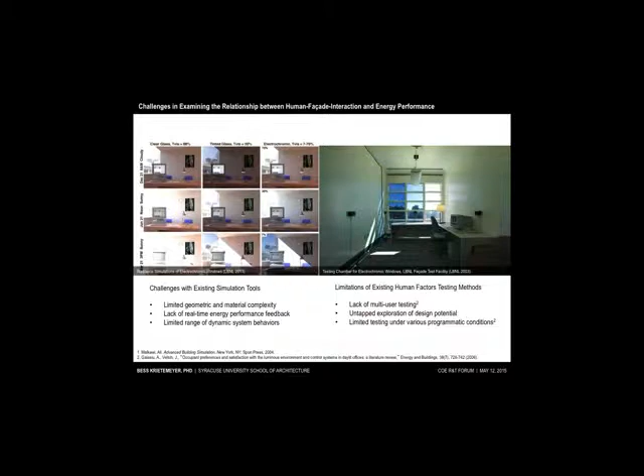And the research we have out there shows enormous potential for these dynamic facade systems, things like electrochromic windows, which we have right down the hall on the 3rd floor. But a lot of this research tends to focus on energy efficiency while postponing human factors issues. So there's often a separation between the analysis of energy performance testing from the human factors testing when we're evaluating a new facade system's responsive behavior.

We also have incredible facilities like LBNL's FLEXLAB, which is a great resource for testing advanced building systems. You can get measurable feedback on the energy impacts and environmental comfort, and it starts to incorporate users in a really important way. One of the biggest challenges with these facilities is that it does require us to build full-scale physical prototypes of these systems, and usually multiple prototypes if you want to test multiple iterations of them. That can be pretty costly to build.

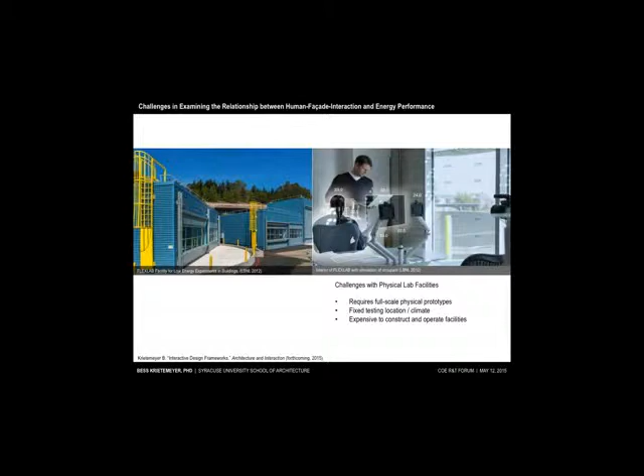So in addressing some of these technical and social challenges, our research focuses on developing a computational framework for examining the relationship between human interaction with these new facade systems and really trying to understand the impacts on the energy performance of the building and also on architectural design.

So in doing so, we're constructing these augmented reality simulations that are based on real physical material experiments that are in the early phases of prototyping. The idea is that by testing these new material systems in the early prototyping phase, for both energy performance and for user control, the goal is to avoid reinscribing this divide that currently exists between these two kinds of quantitative and qualitative criteria.

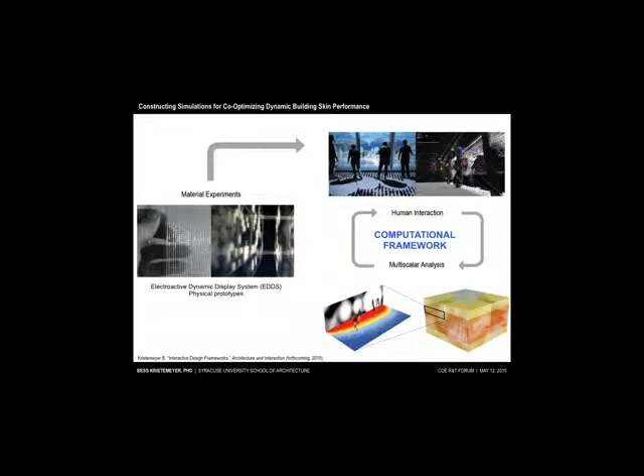So one of the systems that I spent many years working on, you'll hear more about it from Brandon Andow, we're using as a primary test bed for a lot of the simulation work. This system is called the Electroactive Dynamic Display System, or EDDS. It's a dynamic facade technology that's been developed at RPI's CASE. It embeds electropolymeric materials within the interior surfaces of an insulated glazing unit for a very highly responsive condition across the building facade.

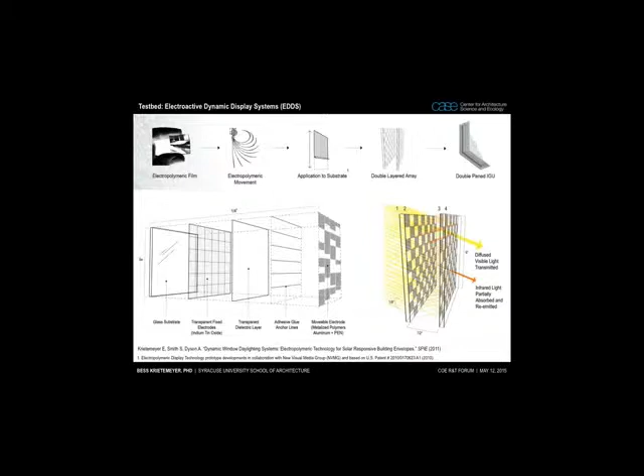So each polymeric micromuscle acts like a little pixel in a display screen. So we have a lot of opportunities for user control over both the environmental effects and the visual patterning effects. This particular assembly relies on an electric current to alter the mechanical behaviors of individual metallized polymers within an ITO matrix.

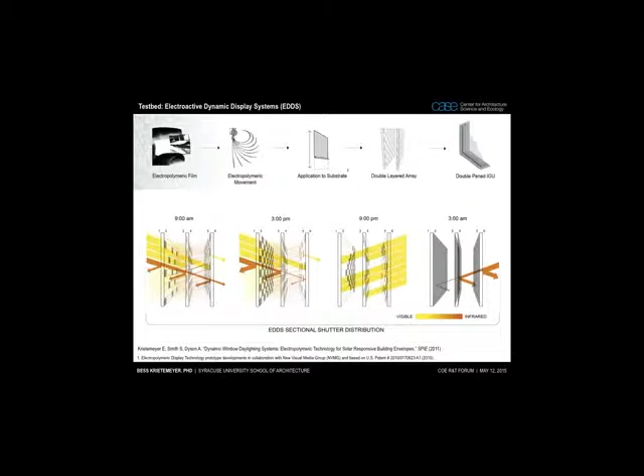And when combined into multiple layers for a double or triple pane glazing system, the whole system can be programmed to geometrically track the incoming solar radiation to block, absorb, or diffuse light in the visible or the infrared spectrum, while still maintaining views past the open pixels. At the same time, the EDDS could be programmed for interior applications or customized for individual preferences along the facade for things like privacy or other kinds of media or information display.

It can also track multiple users within a space, while still adjusting to the changing exterior environmental conditions. So one of our big questions was, if we have so much control over what the facade looks like from a user perspective, what are the effects of this on the overall energy performance of the facade and of the building? And how do we design these adaptive materials to negotiate between the environmental and the occupant demands at the same time? So how can a simulation tool better integrate these criteria?

So we started developing a simulation tool. These are some images from an earlier iteration of this simulated environment for programming the EDDS, and this was installed at Rensselaer. In this setup, we have a semi-immersive projection environment that's simulating the dynamic patterning of the EDDS, and it's visualizing the daylighting effects in real time.

So the idea of a semi-projected, large-scale visualization environment was really crucial to the research because it allowed us to test the environmental effects of a new material system that wasn't physically scalable at this point in time. There are, of course, limitations to the use of projection, along with the need to incorporate multiple users within the simulated environment. So we want to be able to tie in multi-user control to algorithms that help us understand the whole building energy impacts.

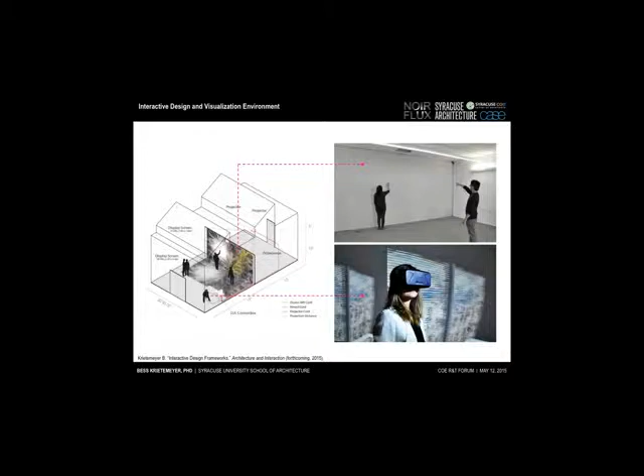So the next generation of this simulated environment is being developed through the Interactive Design and Visualization Lab, which is located right up on the 5th floor here at the COE.

So here the interactive simulations are being improved for their speed and their accuracy relative to the environmental and human response. We're starting to incorporate gestural interactions and other kinds of applications for remote control. So in the simulated environment, you can use multiple sensors to actually indicate where people are, not just relative to their proximity to the facade.

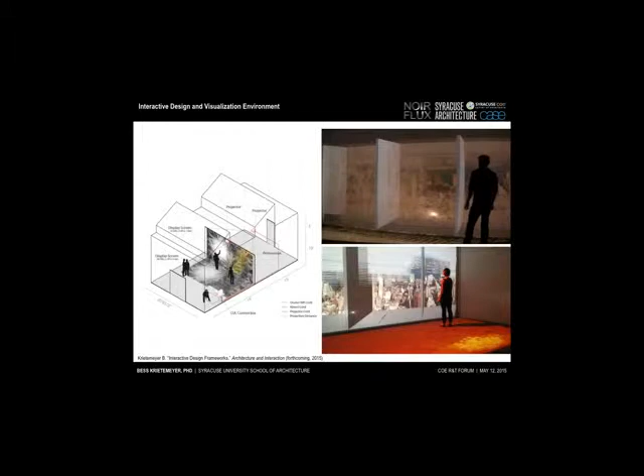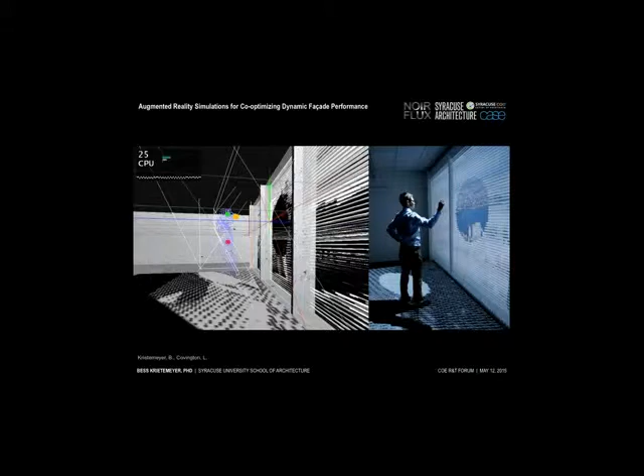So the idea is we can test multiple material prototypes. We can test a range of complex geometries and different patterns, and then link this simulation with commercially available energy analysis software, where we can start to test new methods for human interaction. We can design these new methods, record them, and analyze them based on a range of user inputs.

And we can experience not only the interior conditions of the room, but also the exterior conditions as well. And basically plug in any 3D model, any geometry, or any kind of facade system that you might want to simulate. So again, it's a framework. We're using the EDDS as an initial test bed, but the idea is we can swap out different types of systems, whether it's electrochromic windows or maybe systems that are being developed in other areas in campus that, again, haven't been able to scale up physically just yet.

So these are just a couple of views of the simulation, a couple of exterior views, where you can see the simulation is tracking one person's perspective on the left, and on the right would be our own perspective as we're kind of moving back and forth along the screen. So we're looking at basically a big 2D simulated screen, which we can see upstairs.

We're developing techniques for data collection, where we can document and record gestural interactions so we can start to analyze the tendencies to which people might modify or adapt their own response based on the way that the facade is responding. So there might be a kind of learned behavior between the user and the facade.

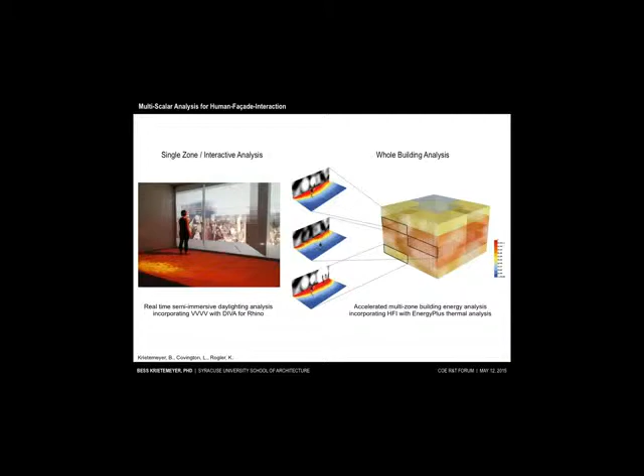And how can we design the algorithms, the control algorithms for these material systems to reduce the building's energy loads and also accommodate the multiple occupant desires for controlling views, privacy, comfort, patterning? So we're now linking the interactive simulations to whole building energy analysis tools like EnergyPlus, so we can understand the environmental and the visual impacts simultaneously of this kind of live interaction at a larger building scale.

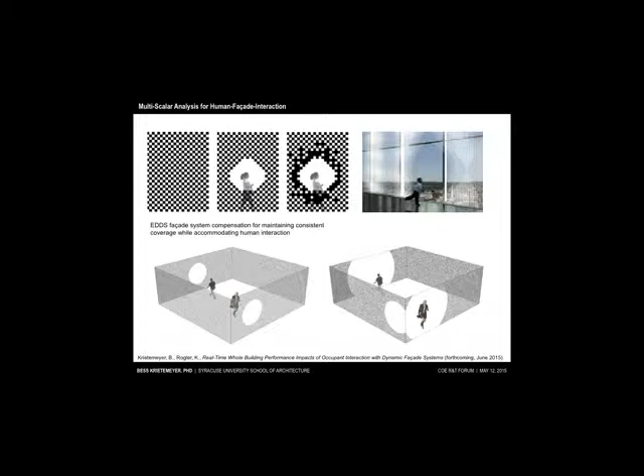And we're starting to examine ways where the system might have to compensate in order to maintain a desired solar control or a specific daylight level in the interior, where it might have to adjust its pattern densities depending on how a person might kind of interrupt its default solar tracking state. And then integrating this information again into the EnergyPlus whole building energy modeler.

And there are still a lot of assumptions within this workflow, such as how we might translate a complex material geometry to a value that EnergyPlus can actually understand, along with the need to calibrate more precise material properties of the physical prototypes to these digital simulations.

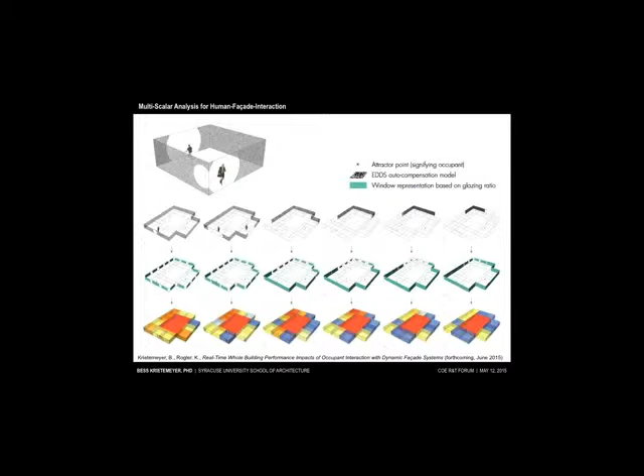But the framework is in place for this whole building analysis to consider live human interaction as valuable input in the design and development process, where we can understand both the environmental and the architectural implications of interaction at multiple scales. And it's really important in this case that we're able to expose these methods to a wider audience and in different settings to get a range of user input. And again, develop these simulations in parallel with the physical prototypes.

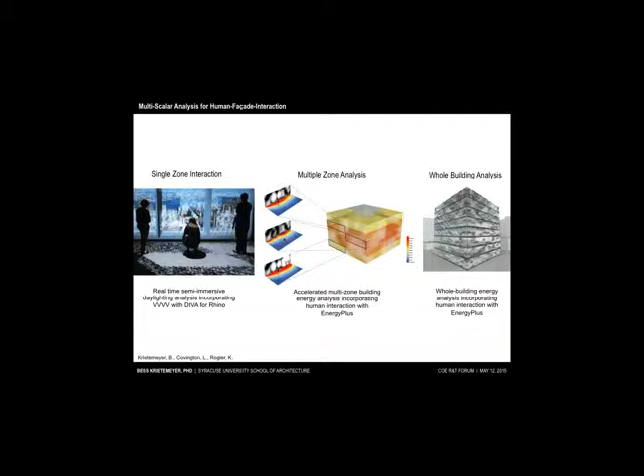And there are a lot of challenges we're still working through in terms of the kind of mobility of the simulations or the need to support multi-user tracking. And we're working on these through the research that's incorporating virtual reality tools like the Oculus Rift head-mounted display. So with tools like the Rift, we can simultaneously design and interact with a dynamic facade in virtual space.

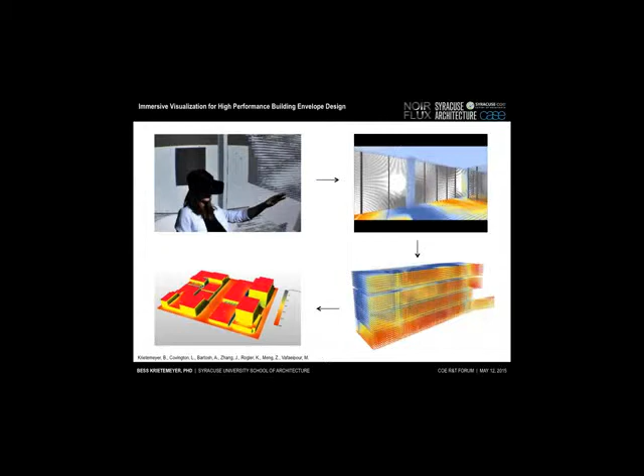We've kind of moved from augmented reality to immersive reality, and still have the ability to modify its behaviors in real time, and still have the ability to understand the energy implications in real time. So we're pushing these boundaries to the whole building and even the urban scales, where we can visualize both dynamic systems in action, but also visualize the kind of ambient energy flows that are happening at these multiple scales. And we'll hear a little bit more about that from Amber's presentation in terms of these other multi-scalar virtual reality applications.

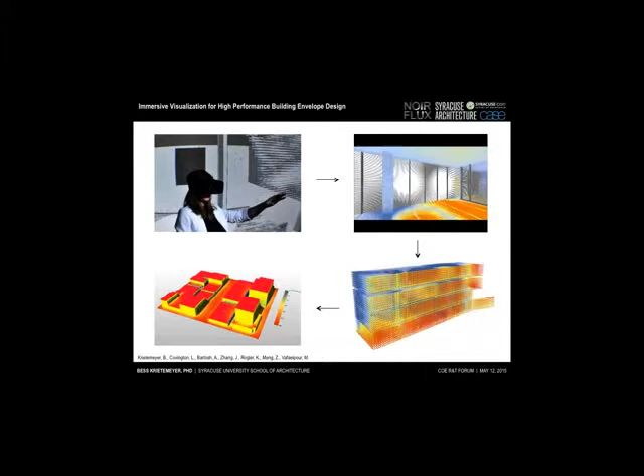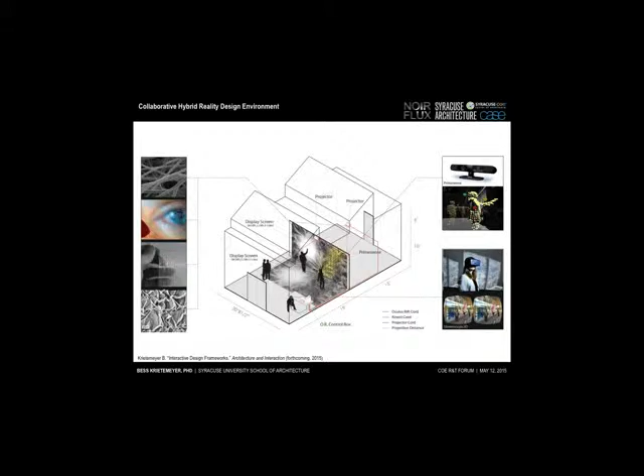So this combination of the hybrid reality simulations offers a lot of exciting opportunities for the testing process, but also the architectural design process, where people could actually collaborate remotely on the same interactive virtual model, which starts to provide a common visual language where we can receive real-time energy feedback on design decisions. So this starts to enable an interdisciplinary dialogue between the lab-scale materials research and these interactive spaces that can visualize and test their scalability within a range of environments and applications.

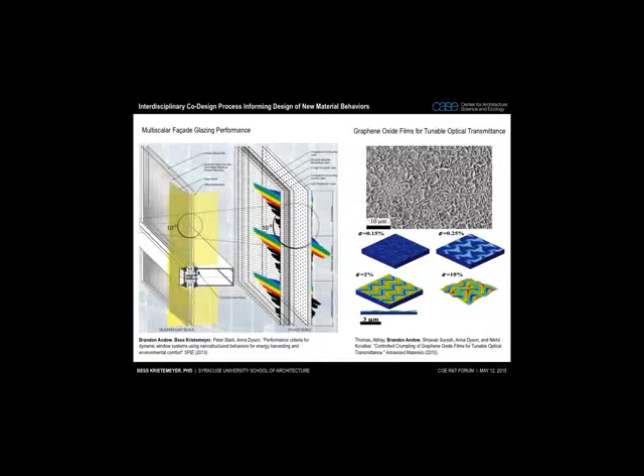So one example of this is, as a result of the simulation work with the EDS, a broader set of architectural criteria for both environmental and user-driven performance is pushing for greater adaptability of these materials at not just the micro, but now the nano scale. We'll hear more about that from Brandon's presentation, but again, there's a stronger emphasis now on criteria for user control, what the architectural implications are in terms of aesthetics and appearance. So all of these things start to become important parts of these design feedback loops.

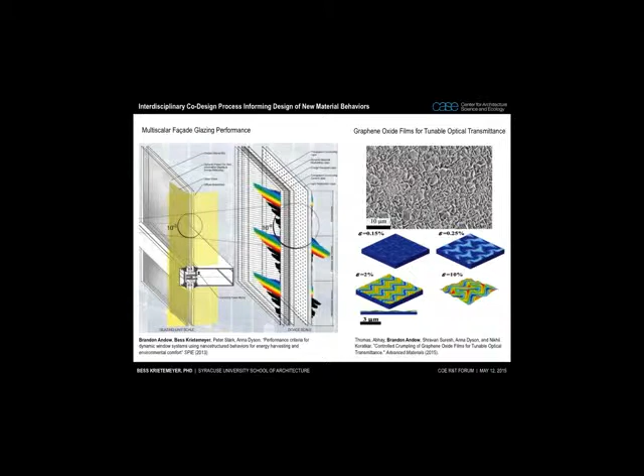So our goal is to continue developing these simulations along the multi-scalar physical prototypes for new advanced building materials and systems. And the idea, again, is by simulating the behavior of intelligent materials at larger, full scales for human factors testing, the feedback that we get from this computational framework can actually start to inform the engineering and the material prototyping of these systems in their early development phase.

Thank you. Bringing up Brandon's presentation. Yeah, that looks good.

I'll introduce Brandon Andow. Brandon is a Ph.D. candidate at RPI's Center for Architecture Science and Ecology, CASE. He is researching multifunctional dynamic glazing materials and solar responsive facade systems. The aim there is improving energy efficiency in buildings while also improving indoor environmental quality. Prior to his graduate research, Brandon worked in architecture for 6 years in New York City with a year-long hiatus to work in Antarctica, repairing buildings at the McMurdo station. He received his MS in Architectural Science from Rensselaer in 2010 and his Bachelor's in Architecture from the Rhode Island School of Design in 2004. So, Brandon.

Thank you very much. So I'm just going to talk briefly, continue this discussion with some recent materials research that we're looking at as far as dynamic transmittance modulation for windows, and then I'll briefly talk about some methods that we're using, slightly more conventional in the sense that they're not real time, but advanced modeling methods in order to scale up the material properties into whole building energy modeling and visual comfort modeling. So we know that windows have a significant impact on building energy use.

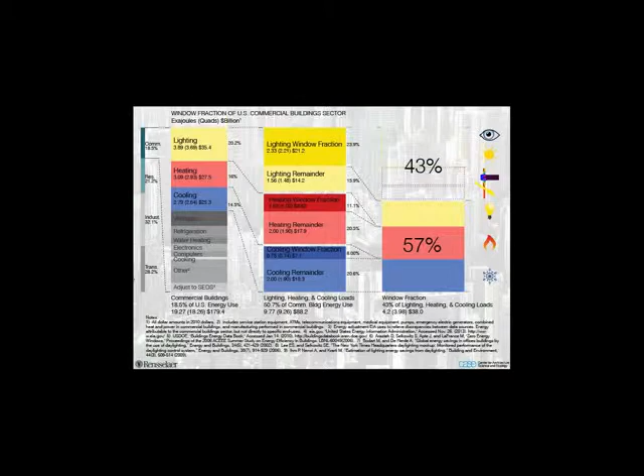So we know that windows have a significant impact on building energy use. Of the major loads on a building, the lighting, cooling, and heating loads, windows can affect up to 43% of that energy use. But realizing those potential savings is challenged by a number of complicated intricacies of the daylighting problem. So when we have highly glazed envelopes, we have often conflicting requirements that are dynamically changing.

We need to mitigate or promote the transmission of light for daylighting or artificial lighting load reduction. We need to control the transmission or absorption of heat for thermal comfort and thermal load reduction. We need to manage the direction and intensity of light for visual comfort, glare avoidance, and productivity. We need to promote the proper visible spectrum distribution at the appropriate time of day for human physiology and circadian entrainment. We need to simultaneously achieve all of the above while co-managing privacy with views to the exterior and serving as the primary design element of the architecture. The facade is the primary design element that we have to work with.

And then additionally, for net zero energy buildings, any incident solar energy that's not directly used as daylighting needs to be converted into something useful. So that's the overarching goals that Bess mentioned. We took a look at performance criteria for dynamic windows, and this is something we've referred to as dynamic facades as a slightly larger umbrella. How do facades manage the energy flows at a building envelope in order to take care of all the needs of occupants in the building? So that's a complicated set of requirements.

Now there are plenty of dynamic window technologies out there that exist in different levels of development, and we're familiar with some of them. I'll go down the line, sorry, they're all abbreviated. Electrochromics, suspended particle devices, liquid crystal devices, photochromics, thermochromics, gasochromics, which are largely in the lab. There's some recent developments on microblinds, and we have the EDDS system up there as well.

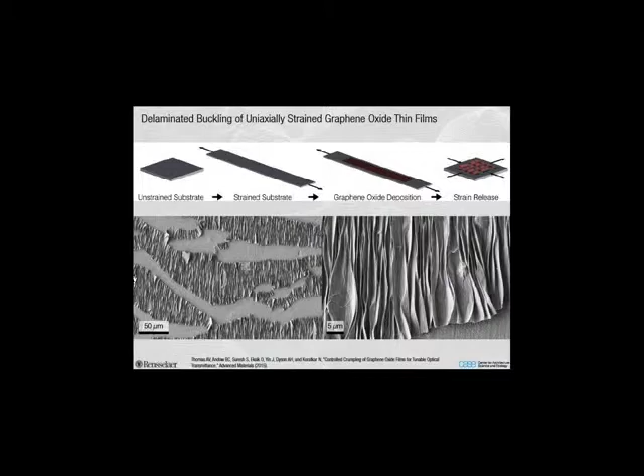So we're looking at, it looks like the title's a little cut off, sorry about that, but we're looking at graphene oxide thin films, which are very mechanically robust. We can dynamically wrinkle these films and create crumpled structures, which result in light trapping and light scattering structures. So here, just initial studies where we're uniaxially stretching this substrate, and we deposit the graphene oxide thin film, we're talking about 20 to 80 nanometer thin films. When we release that strain, it crumples the structure.

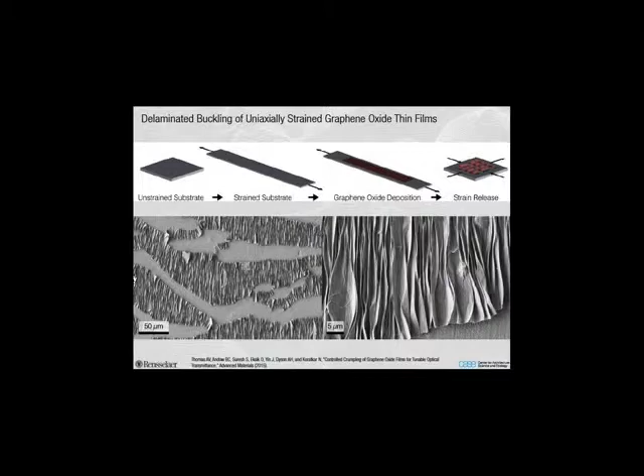And we can dynamically strain and unstrain that substrate in order to control the topography of that structure. When we do it uniaxially, when we release it, it obviously creates tears in the transverse direction as the material expands. But as we move to biaxially straining the films, we get a very nice, dense, wrinkled structure in this very mechanically robust thin film. And so what that allows us to do is go from a flat film up into a crumpled structure, which creates light scattering and light trapping.

Again, these are very small, a couple microns in terms of the full dimensions. So there you can see a lab scale prototype, about a centimeter square on the top, of the film being strained, going from an opaque state to a transparent state on the right. And then there's a microscope image of that film as it goes from a dark state into a transparent state.

In the last two of the sort of pinkish images on the right, we're actually overstraining the film, so if we need to, we can start putting more transparent films and changing the dynamic range of that film. So the direct normal transmission here on the lower left, with some very high strains, we can achieve a pretty wide visible transmission range from 0.09 to 0.87. And then solar transmission range is a little bit smaller, from 0.18 to 0.9.

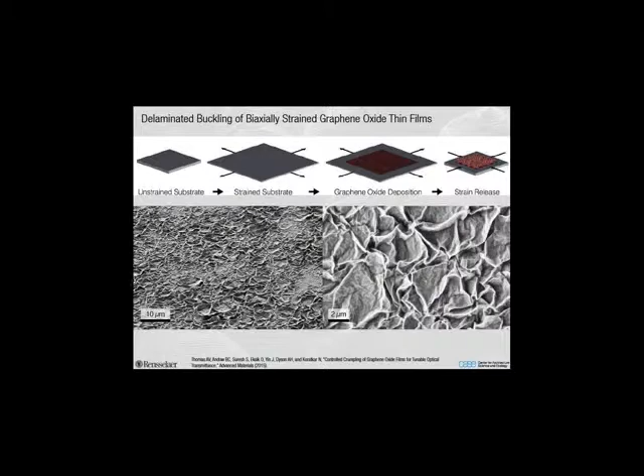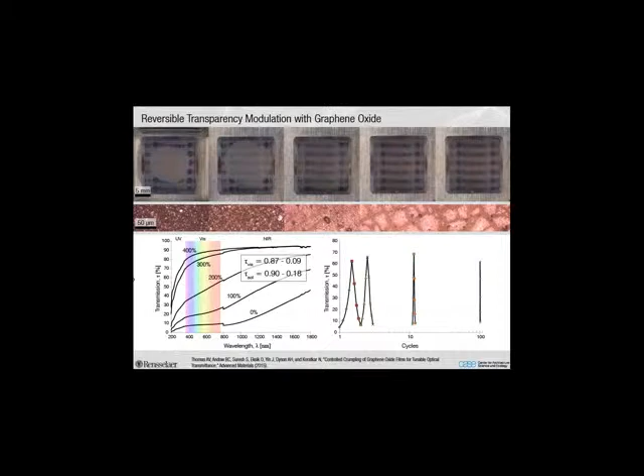We cycle the film over hundreds of cycles. We've actually gone up to 500 cycles, and we see only minimal degradation of the transmitting properties as we cycle the films. This is a delaminated buckling structure, so we are peeling blisters off of the film and laying them back out flat. So we definitely want to test how well that cycles over many cycles over time, as the window needs to change a lot. So that's cursory. Obviously, we need to get up more to like 10 to the 5 cycles for a viable product, but we see good resistance to degradation so far.

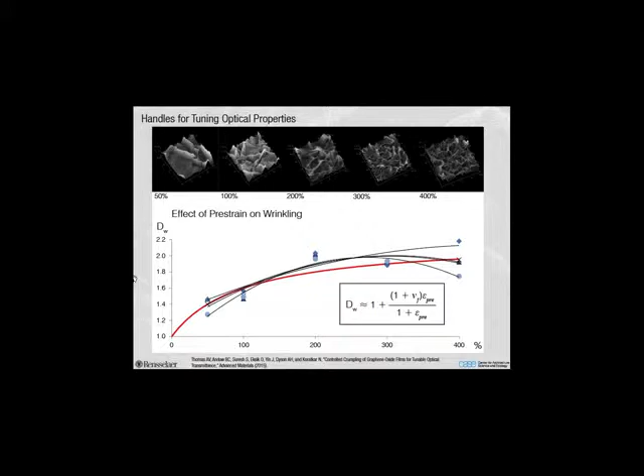And so we went through a lot of modeling, and actually Bess showed more of the finite element modeling that was done in one of her slides, but we come up with some analysis of how the folds mechanically form when we put the film under strain. And so on the top we have AFM images of various pre-strains of the films, and then the red line is the theoretical prediction, and we seem to fit pretty closely.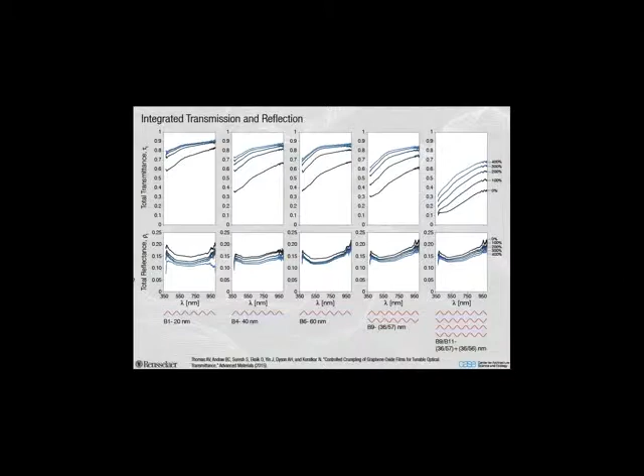And so these are summing up the transmittance ranges that we were able to achieve. With varying thicknesses and multiple layers, we can start to get a range that's competitive with what we need for deploying into a building on the far right side there. And that little dotted line, again, is overstraining the film. We can start to increase the transparency at the high end if we need to. So that's just a brief update on some materials developments.

And then we want to project into the future or scale up what the effects of the material properties we're investigating are, and how that affects visual comfort and whole building energy use. So you can imagine, again, a pixelated system. The wrinkled structures would stretch and close in order to wrinkle the graphene oxide film, and we could put it on surface 2 and surface 3 of an IGU, similar conceptually to the EDDS work. So it's a model with similar assumptions to model EDDS, as well as a projected version of a graphene oxide device.

So here, just describing what solar tracking looks like with that. If we deploy, we can turn certain pixels on and off, and we can start to follow the direct beam of the sun. And this is very important for visual comfort, as if we start to block just the direct beam and allow diffuse light to scatter through the window, we have a much lower contrast that comes into the space and are able to better control for glare. And coupled with the scattering properties of the film, we would anticipate a much better visual comfort performance from these films versus the specularly tinting films.

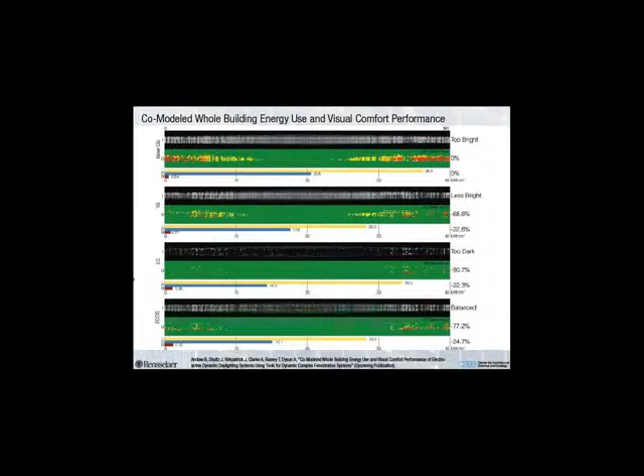Amber Bartosh. Amber's going to take a quick computer change over here. Amber is an architect and interior designer. She is LEED accredited and has completed both gold and silver level LEED projects and served as a project manager for Emergent Tom Wiscombe LLC, an internationally recognized architectural practice focused on integrating biology, computation, and contemporary design sensibilities. Following her cum laude double major in architecture from Rice University, she went on to graduate work at Southern California Institute of Architecture, where she got her master's in architecture and the Alpha Rho Chi Medal.

Amber is currently an assistant professor for the School of Architecture here at Syracuse University, where she teaches both foundation studios and representation courses focused on expanding the capacity of digital media in architecture. Amber, take it away.

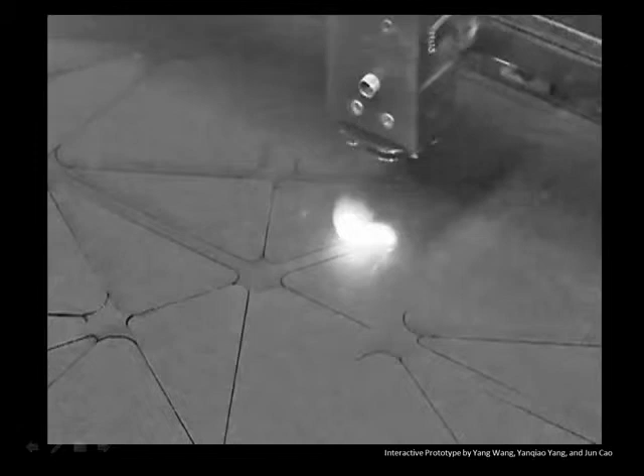Playing it there. Okay, great.

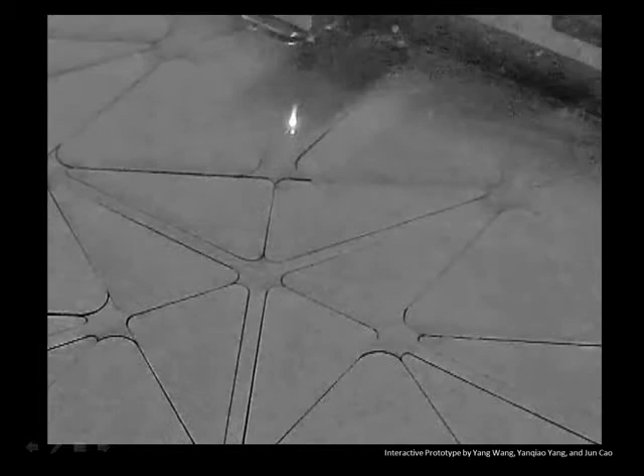All right, so the students were asked to actually physically design and fabricate prototypes that were machines that would take in outside sensor technology and then operate these machines. So you can see that the students actually had to physically manufacture the work, as well as design in the computer the models that were the precursor for the work that they were fabricating.

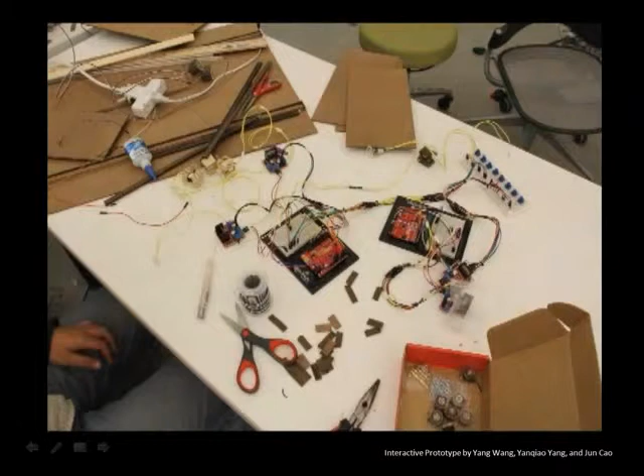And then they're going to use these microprocessors called Arduinos in order to control them. So here you see one of the machines, the little thing in the red up there, that's the Arduino board. It's like a little hard drive for your computer. And all of those wires are then connecting into the breadboard.

And then ultimately that goes into the computer, where this microprocessor is controlled through a 3D modeling Rhino, which is using a visual programming language called Grasshopper, and then going back and forth between them using something called Firefly. Now that's a lot of animals. But ultimately, the work was to make these interactive devices that are using things like light and humidity and sound as drivers for the design process.

So to add to that, these things were integrated into their studio work. So I teach media class as kind of a sidebar to their studio work, but in this case, the students were specifically asked to design the machines for biomes across the globe. So the machines were intended to address the Anthropocene era, which is the era in which we as humans have had a negative impact on the way that the environment works. So these machines are intended to address bio conditions and look at how they can mediate that.

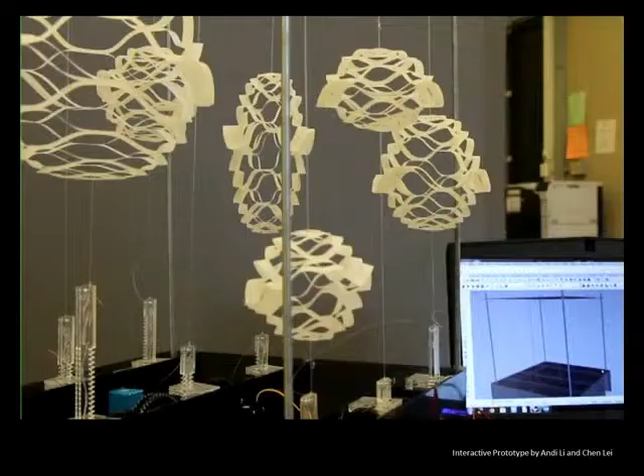So this one in particular is actually using the condensate in the air. It's designed for the savanna. So as water is condensating on the surface, then it starts to lengthen and then drop that water into a cavity down below.

And so you can see in this model that the model is actually working in 3 different phases. Like you can see the actual physical prototype is active. Then over here in the bottom right-hand corner, you can see the digital model that's actually active as well. And then, of course, here you see where they're speculating on how it would actually be applied into the biome of the savanna.

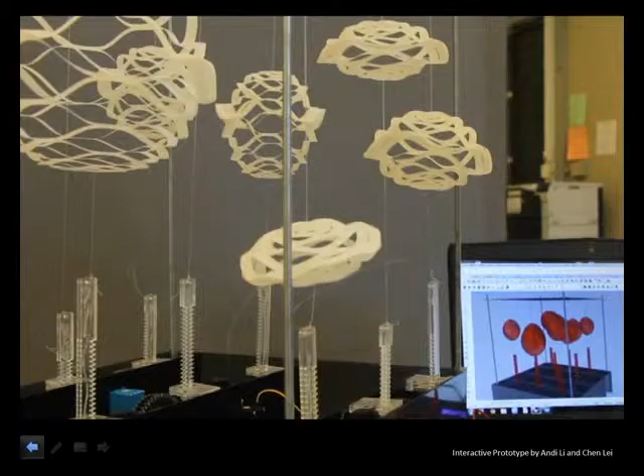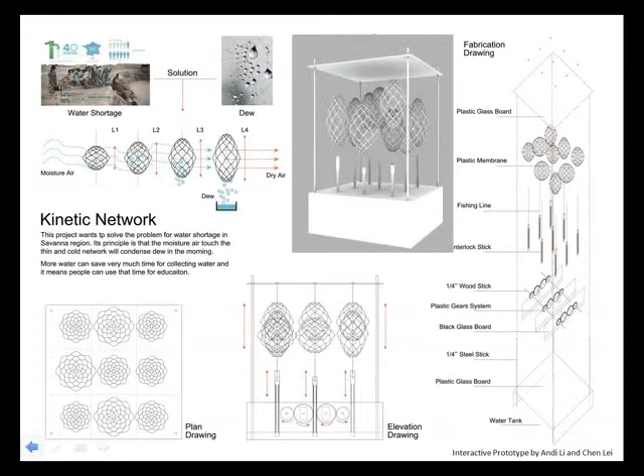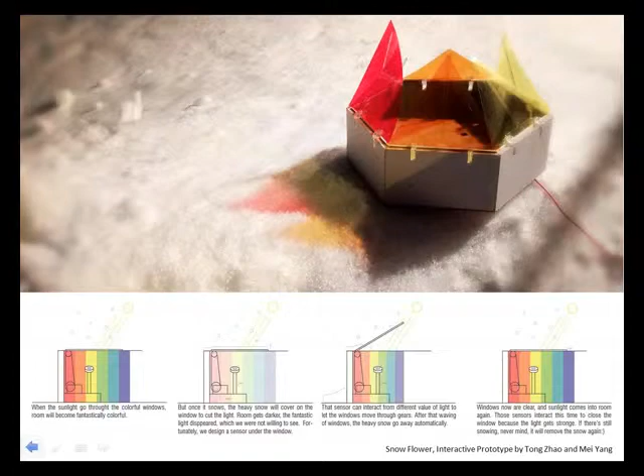Now, this is a condition that we are maybe more familiar with. Now, the students are being a little bit cheeky by installing their prototype on Frank Lloyd Wright's Falling Water, but this particular machine addresses snow. In particular, it's using a translucent and colorful glass ceiling system, and then measuring the light levels below so that when it gets both cold and dark, it recognizes that it's got a snow load on it, and then flings the snow off, so clearing the ceiling. And of course, it has a decorative aspect as well.

Now, some other students started to not just question how this might be relevant to a particular biome, but actually looking at sort of mischievous ways that this could reconsider how we engage spatial conditions, things that we already know. So you'll see that this prototype here responds by intensifying the action that's placed on it. So as they push on the surface, the thing starts to pull away. As they pull on the surface, the thing reacts by growing towards you. And it's creating these little gaps in the panels between. So you can see maybe in between those little furry things, there's actually openings that are created.

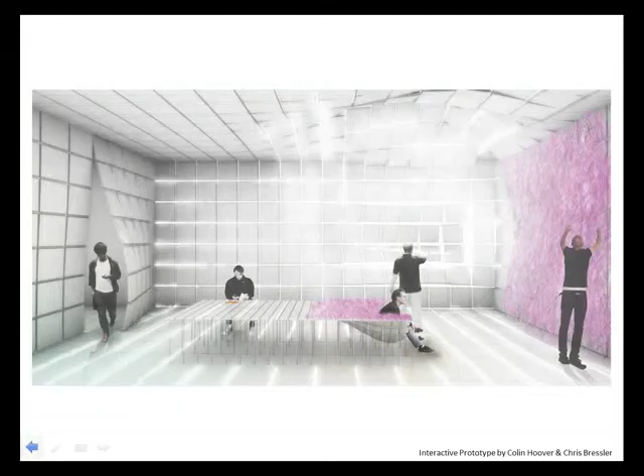Now the students decided to take this a step further at that 3rd scale where they're looking at how would this change the environment. They're looking at, well, this could be the way that we have doors in the future. This could be the way that we consider both skylights and windows and even furniture.

Now, the second half of the semester asked them to consider what is it like to occupy media. Now, if you think about it, media already occupies a great deal of your built environment. So how many people are used to having the meeting where half the time everybody's on the phone, right? But right now our relationship to media is generally between us and the screen. So we had a conversation about what does that mean to our built environment, and the students came back with varying levels of responses. Now, one question was, if you've ever been to an architectural presentation, they tend to be very static.

We pin up our work on boards. We still rely heavily on drawings, which will never go away. And they tend to be a kind of live presentation. But our lives are filled with things like YouTube videos and very short snippets of information delivered to us rather quickly. So one of the first things the students did was question whether or not that was the way to present,

Okay, that's not playing sound. I don't know. Okay, it's okay.

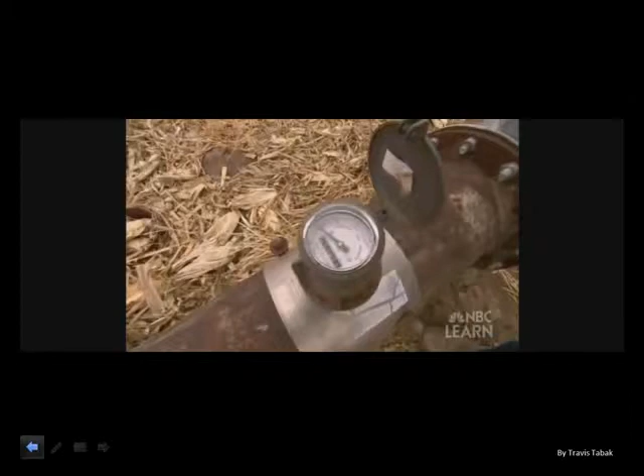So here you see the farmer talking about the drought and the fact that they're pumping tons and tons of water out of the aquifers, more than is being reconserved into it. So he has designed a prototype of a machine that uses technology that we've had for a while called a moisture vaporator. And in a second, you'll see a little clip of the machine that he designed and how it

works. And so there's a kind of bellows that moves up and down that's triggered by a humidity sensor that then allows for condensate to be captured and then piped to the plants through a kind of system underneath the ground as opposed to irrigation from up above. This guy's telling you that you don't need to worry about the environment. What you need to worry about is our place in it.

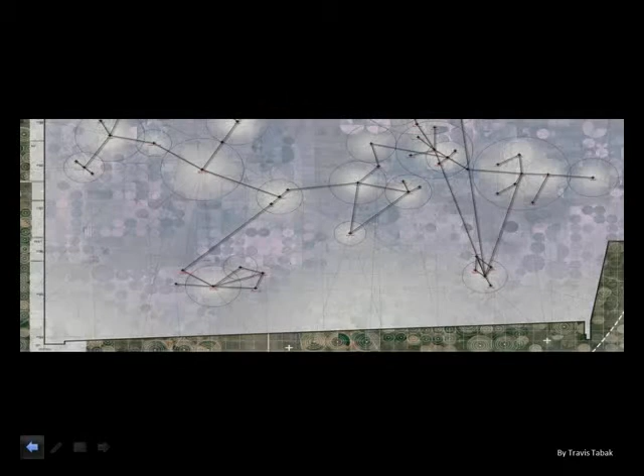And now you'll see the drawings and work that the student was doing for their presentation. So here we're moving through in animation. These are solar-powered panels that are driving the energy for the system. These pylon sort of things that you see in the field are the actual moisture vaporators. They look like giant columns. This is a site plan.

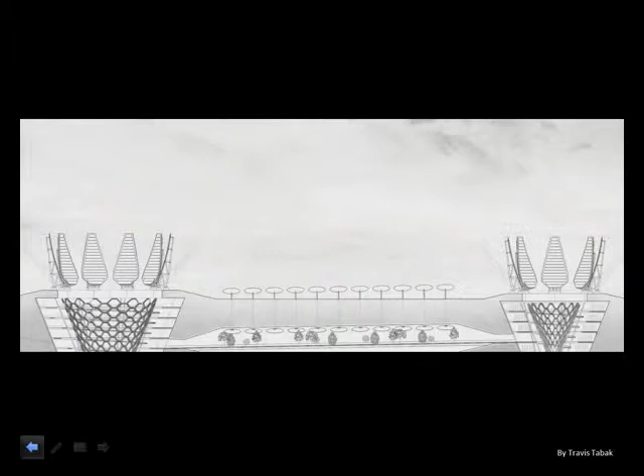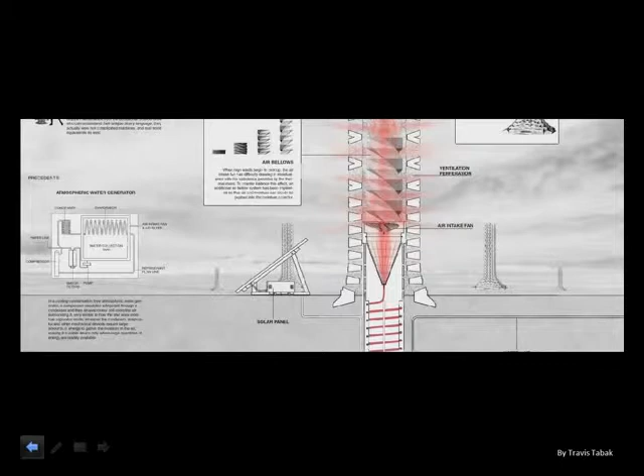So all of these drawings are typically just sort of pinned up in a traditional architectural representation. But the student is trying to use media as a way of immersing us through the storytelling device of: this is my project, this is my design, this is how it will work. So this is the interactive prototype at work. You'll see a bagged soil in a second. And then this is showing you the Arduino device driven by a humidity sensor that's then ultimately pumping the water into the plant.

Now, another way of being more immersive with media is to borrow the poor man's Oculus Rift. So I don't know if you guys are familiar with this. This is a Google Cardboard. Anybody know? Yeah? Okay, cool. So what you do is you take your smartphone, you start to play the video, you put your smartphone in here, and now you've got a poor man's Oculus Rift, right? You can buy one of these for $5 off the internet or make your own. There's templates for the laser cut file.

So the students found two ways of embracing that technology as a way of both informing their design work and also representing their design work. So this is called a Photosphere. You can actually do this with your phone. I did this one in a space in Buffalo, New York. And what you can do, and I'm going to demonstrate it here, maybe.

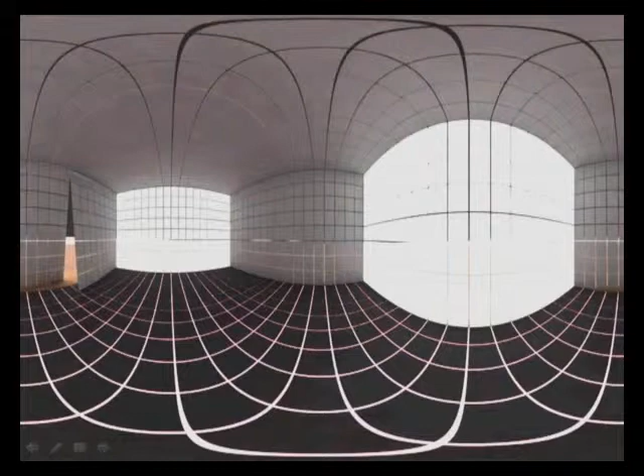So these are the same students who made the furry wall before. And you'll see in a minute how they're showing the space actually operating here as well. So we're actually occupying the space as it operates. So watch the table and the wall and the ceiling. You can see that they're starting to open up in a similar fashion to what they showed in their speculative rendering before.

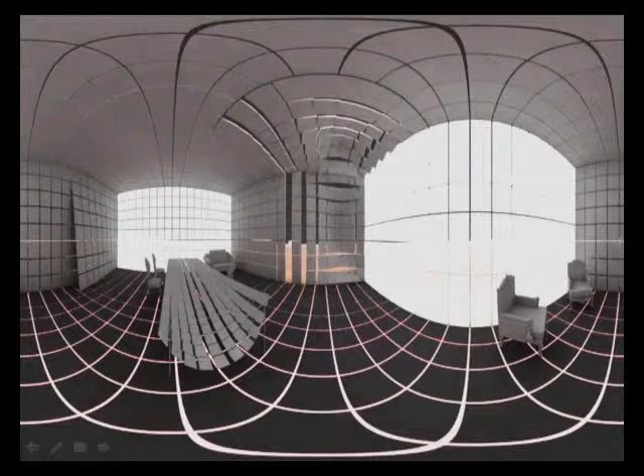Okay, so what does that mean about what we're going to do in the future? That all seems very, very fun, right? I think it's going to be more fun, but it's also going to challenge what we think of as our real environment, and what is virtual, and what's the space between those two things.

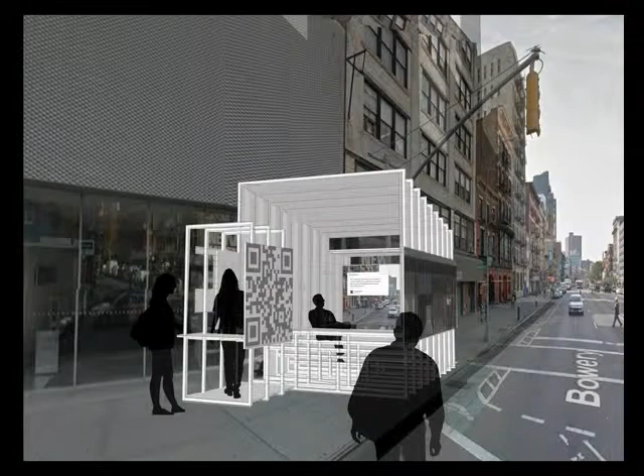So this is a competition entry that I did with a couple of my colleagues for a competition that was sponsored by Storefront for Art and Architecture in New York City, and it was for a pavilion outside of the New Museum. So the competition asked for a new space for assembly and public address, and we designed something called a digital soapbox. So here you see the pavilion in front of the New Museum.

An experience begins with this uninformed passerby walking into the big screen you see on the left-hand side. And so that's a static image of what the view would be beyond the pavilion, but you already start to recognize that it's not exactly the view that you would actually see. Inside of the pavilion is a projection room and an assembly space where you could watch the action happening later on.

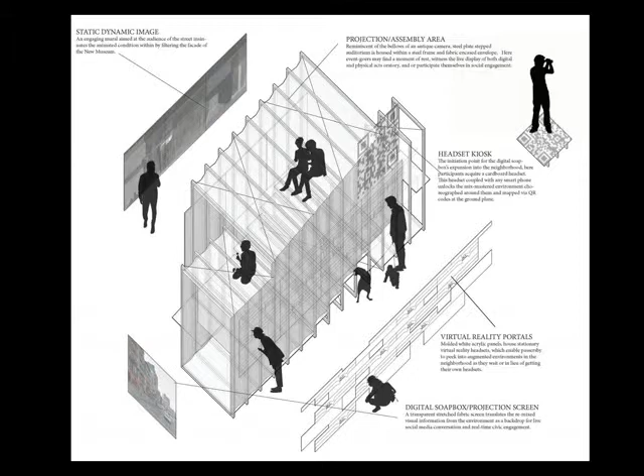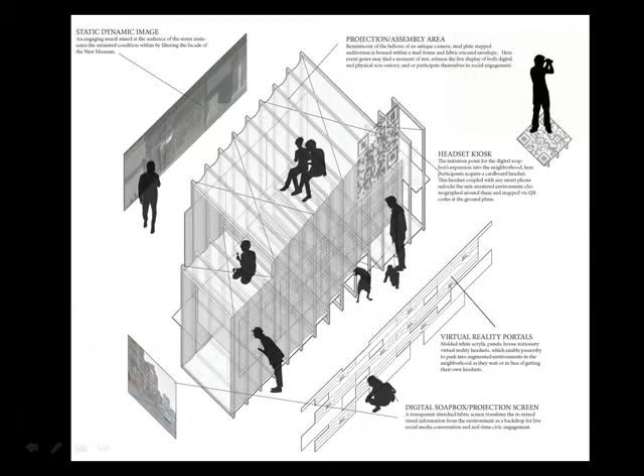And then over here on the far right of this lower left-hand side, you'll see that there are actually embedded virtual reality viewers. So you can walk up to the wall, and it's essentially like putting your eyes to this thing, and you would see the augmented reality device in 3D. The last step is then to go to the headset kiosk and get your own Google Cardboard, and then you would go on a scavenger hunt through the city.

And what you'd be looking for is a series of QR codes which you would scan with your phone and then insert into the Google Cardboard device, and you would recognize the environment that you were in as being augmented. So there would be this moment where you would look at the environment that you're in, then start the Google Cardboard device, and essentially see something that isn't quite what's actually there. So you can imagine people doing a whole lot of this, right?

And this brings me full circle to what Bess was talking about earlier. What does this mean in terms of what the COE is doing, and how does this relate back into environmental systems? So Bess and I and Lauren Covington in the back and a few other collaborators are looking for a way of manifesting our environments in a way that can be virtual and tangible. So things like energy are hard for us to describe in a way that's interactive. We tend to use a lot of graphs and a lot of color pictures that have pixels on them.

But we are doing a piece of work that's funded by the COE here in collaboration with the Museum of Science and Technology, which is trying to look for a way to make research that is interactive, visualizes, and simulates, so that designers can learn from the process, but also, more importantly, to bring an awareness to a larger community about what it means to make decisions about things like dynamic facades and how that affects a user both at the urban level and at the building level.

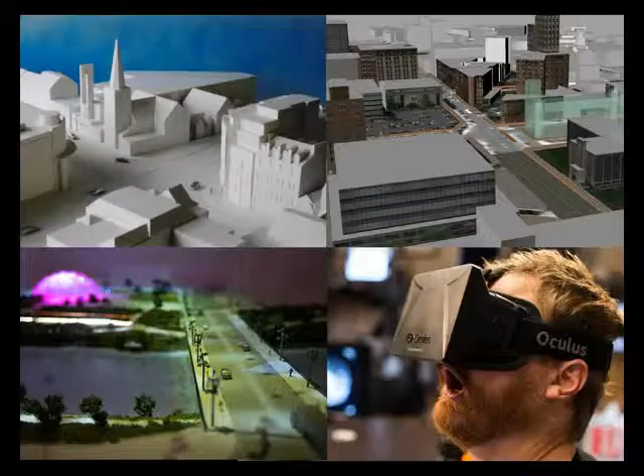So it's going to integrate both a physical model, a digital projection on the physical model, and then ultimately, of course, virtual reality through either Google Cardboard or Oculus Rift. So you can see that it's a work in progress.

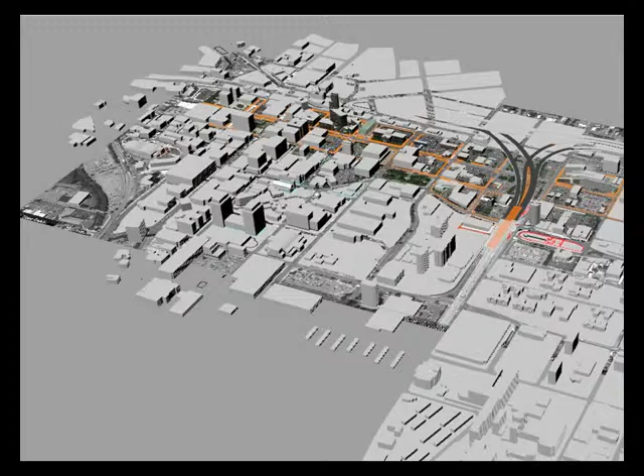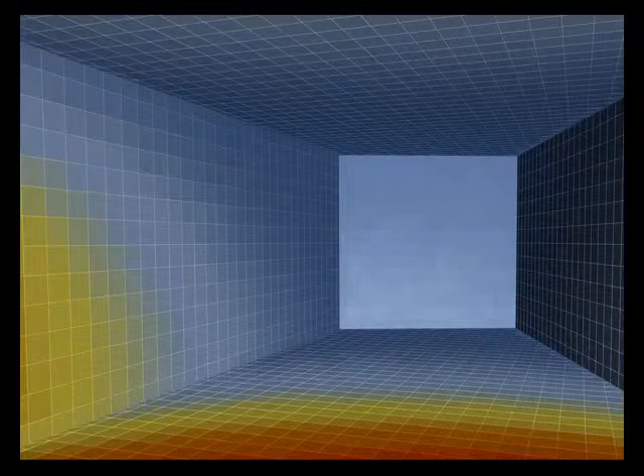We've modeled the city of Syracuse, and we are working with a program called Unity 3D as a way of occupying that digital space in a way that we're familiar with because of video games. But then ultimately, we're trying to integrate into that some kind of tangible way of describing what you see here, which is a kind of heat map of solar gain, in such a way that it's tangible and interactive.

So this would encourage people to be not only just aware, but start to manipulate their environments, because they could be in that space virtually, in much the same way that we saw it working in Bess's prototypes in the lab upstairs. So hopefully that gives you a broader scope of what responsive environments could be.

So that was great presentations from all three. So if you'll all come back up here, it will open up the floor for questions. So who has questions?